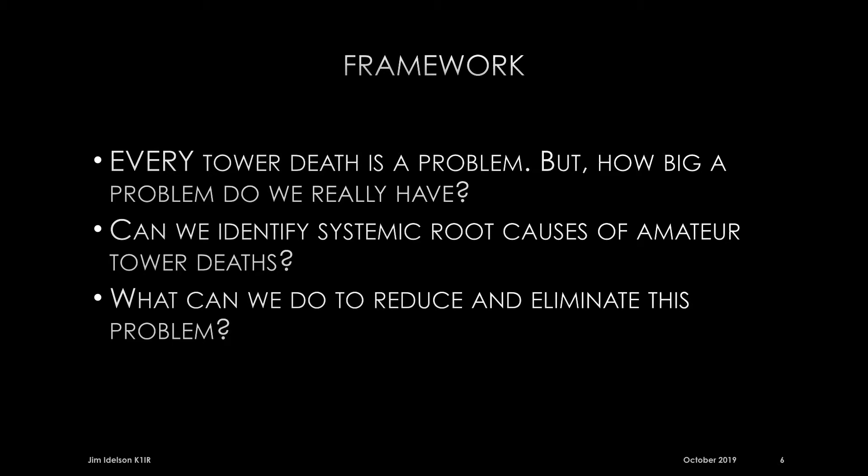All right, so another thing that's important to do is make sure that you're not reinventing the wheel. It turns out that in 2012, PBS Frontline and an organization called ProPublica, which is an internet-based investigative journalism kind of group, got together and they looked at a suspicious situation in the commercial tower climbing business, which was around the same problem. There was a suspicion that there were excessive numbers of fatalities in that business.

It turned out that there were problems that could be addressed. But what I found was that there were other things that I learned after looking at this. One being that there's a lot of data available and that we could use the data to analyze and compare. I noticed that they had already determined some potential root causes for the problems that they were having.

I also found that government has a role. Of course, we're talking about the commercial and occupational world versus the amateur at home in your own backyard world. But there's certainly things that we can learn. And then finally, industry, and there are standards. So there's a whole bunch that we could learn from what's already going on in the commercial world.

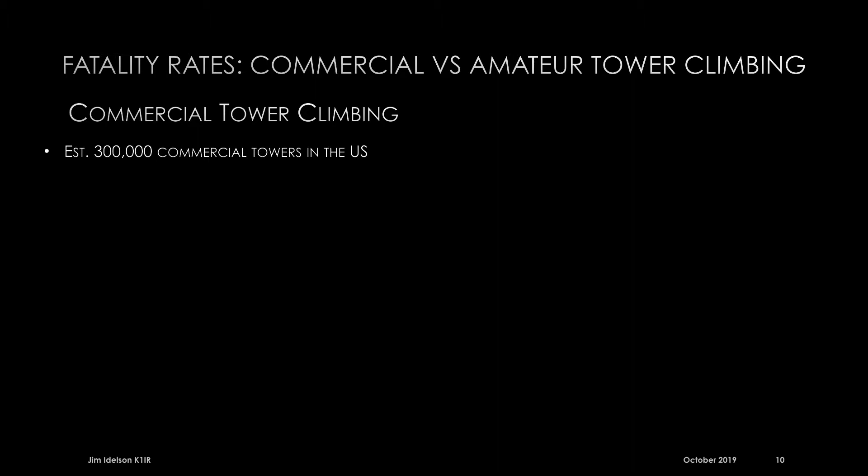Okay, so now let's look at the stuff we really care about. In the commercial tower climbing world, interesting number, there's an estimated 300,000 commercial towers for various purposes in the US. A little more than 5,000 full-time equivalent workers. Is everybody familiar with the concept of full-time equivalent? I didn't see everybody nod. So if I have 2 workers, each of them working 50% of their schedule, the 2 of them together equal 1 full-time equivalent. This is a way of getting the part-time problem out of the equation.

And by the way, there is a lot of part-time in this particular industry. There's probably something like 10 or 15,000 estimated workers, but full-time equivalent only 5,000 after you take the part-time out of the equation. The number of deaths, and again, all this data was collected and reported through both the OSHA data and the additional investigation that those guys did on PBS and Frontline, averaged over a 9-year period, 10 deaths per year.

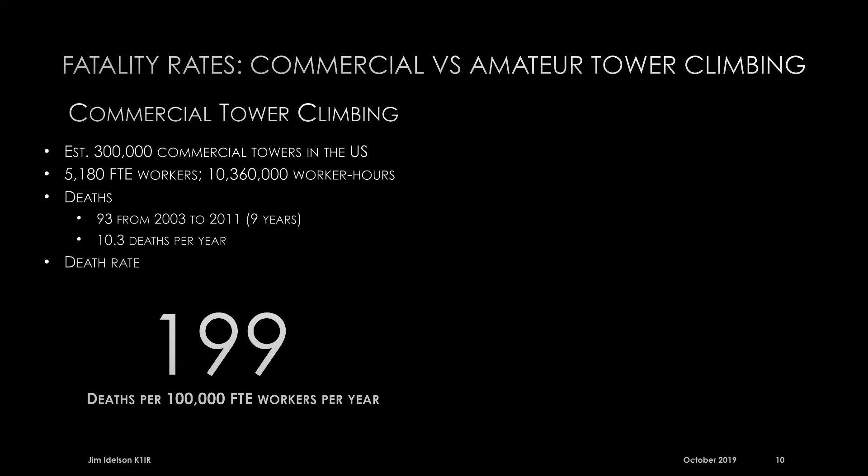So when you normalize that, remember we only have 5,100 workers, so you've got to get to the 100,000 level. It doesn't mean we're losing 199 a year, but in order to compare it to other things, 199 or roughly 200 per 100,000, right? Now, what's on the other side of this chart?

Amateur tower climbing. And there's a lot going on in here, and I need to talk about that a little bit. In order to come up with this number that's going to show up here, we had to come up with a model. How much tower climbing do we do, and how many?

In order to do the fatality rate, we need to have fatalities, which we know, by the way. If we just start with the 2 that we talked about in the last year, we have to divide by something, 100,000 full-time equivalent workers. So how do we get to that? So we took an approach where we made an estimate of the number of amateur radio towers in the US.

And you will ask, how do you come up with that number? Somebody asked. I'm glad you asked. I was racking my brains how to do this. And I was thinking about Sudbury. I live in Sudbury. I could go get a list of all the hams in Sudbury and run around and see how many of them had a tower in their yard. I thought that was a good idea.

But then I realized that was a somewhat spread out suburban kind of area. What would the rate be? That would be a sample, but not a very good sample because it wouldn't represent the urban density of towers. So we had to come up with something else. So we came up with a model where we used Google Earth, and we wrote some software, and we also had a suspicion that the number of towers per ham would be higher for extra class hams than for generals and then for technicians. That was just a working theory.

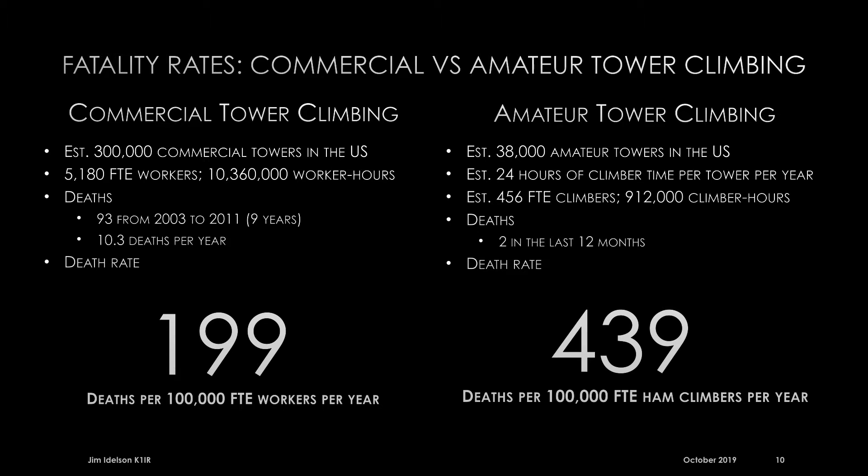And we had 2 fatalities in the last 12 months. There's the number when you normalize it to the 100,000. So it's twice as risky. As I did this research, I ran into more information about what was going on in our world. And it turns out that I got to move these 2 guys over to make room for 2 more in the same 12-month period.

Okay. Ken Waddell, this I believe was in Tennessee. Ken Waddell, a father of 5, was a commercial tower climber who was assisting a ham radio friend in working on his tower. And the tower came down and he lost his life.

This fellow here, Lee Parson, I think this was in Pennsylvania. And he was just working on his own tower in the backyard. And I think he was alone. I'm not sure, but he was putting one up, and he came down with the tower as well. Okay, so it wasn't 2, it was 4. And what happens to the numbers? Guess what? You know what happens to the numbers.

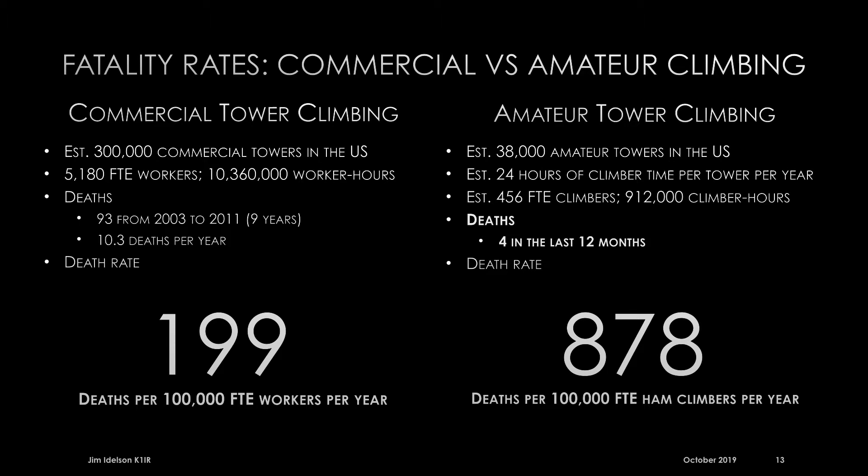They get worse. Okay, so commercial versus amateur tower climbing. With these assumptions, which I think, especially the 24, is kind of conservative, give us that kind of number for the last 12 months. Not good. And by the way, the 199 number that we had there, that was considered extremely high. That was at the worst of the situation with the commercial tower climbers. They've brought that down since as a result of the uproar that came about as a result of the articles that Frontline did.

Okay, so then I said, all right, commercial tower climbing, fine, it seems unsafe. Let's look at something else people consider to be unsafe. So I found some numbers on skydiving. Skydiving is pretty popular in the US. They count the number of jumps. The USPA, U.S. Parachute Association, is the group that handles all the safety-related stuff and tracking. They track the number of jumps and they track the number of fatalities. So 13 recorded fatalities in 2018 out of 3.3 million jumps.

Okay, so I needed to do some normalizing here again. How many jumps per fatality is this number? 250,000 jumps, 1 fatality. Now, over in the amateur tower climbing world, we needed to do something similar to jumps. So we just took those 24 hours and broke it up into 4 climbs, 4 6-hour jobs. I don't know, maybe it's less or more, but it's in that range. And again, we had the 4 deaths in the last 12 months. 1 climber fatality per 38,000 climbs. This is 7 times more likely than the fatality rate for skydiving.

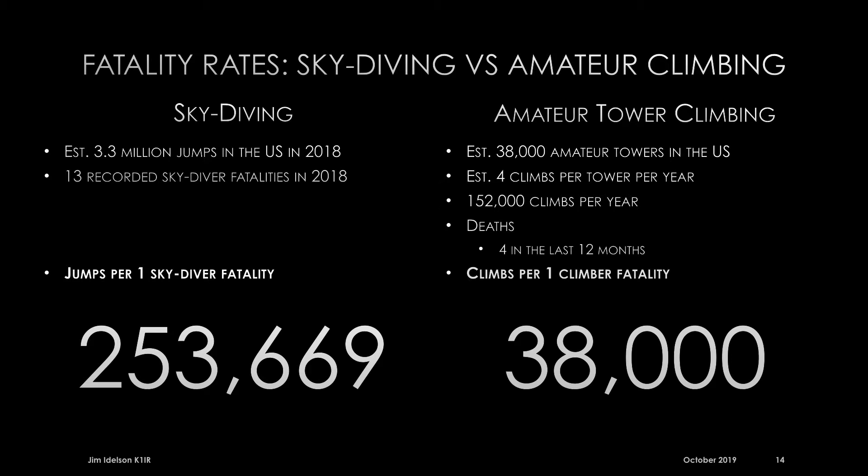Okay, so I think the message is coming clear that we do have a problem. The rate of fatalities that we have relative to the amount of climbing we do overall is too high. So I answered the first question. The first question was, do we have a systemic problem? I think we do. So now we move into the second phase of the investigation, and we need to look at the data and try to understand whether there are any of those root causes that we could attack.

All right. So one thing I wanted to understand, this is a little side trip here, how dangerous is it to work at height? What are you likely to get hurt at what height? I found a study that was done in New York City. It was done based on emergency room records in a Bronx hospital, where they had information on falls and injuries, but they also knew how high the person fell from. So there were almost 200 cases available.

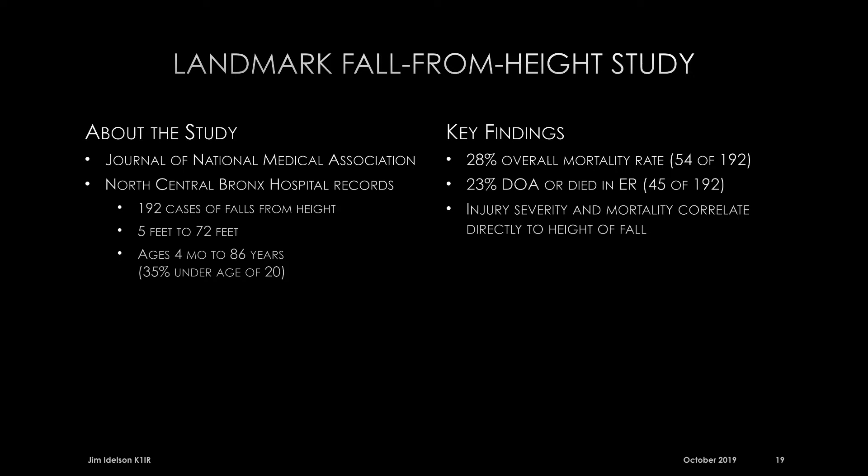The range in height that they fell from was 5 feet to 72 feet, and there were young people in here as well as older people. It turns out that this data is biased heavily towards under the age of 20. A lot of very young kids fall for different reasons from windows and stuff. And that actually has an impact on the results. 28% of all of the 192, 54, died, one way or another, either immediately or they didn't make it through treatment.

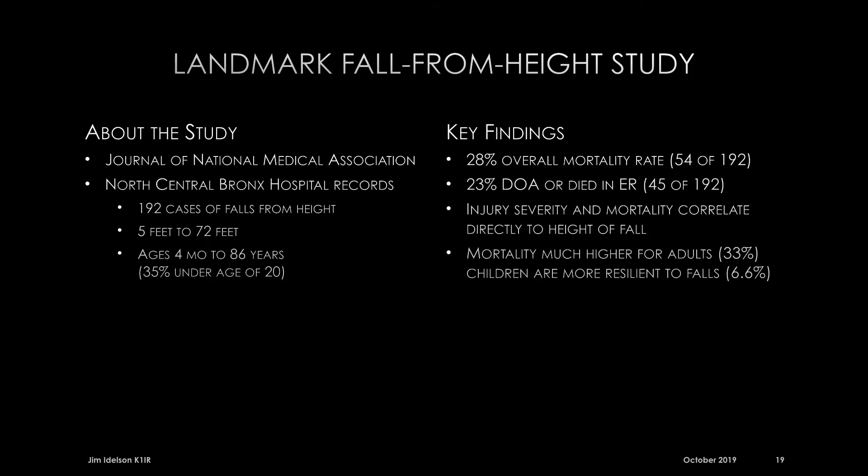23%, so slightly less, never even made it into treatment. They were DOA on the ambulance or on site or when they arrived at the emergency room. Very important is that the severity of the injuries, up to and including dying, were directly correlated to the height that you fell from. So the higher you fall from, the worse off you are.

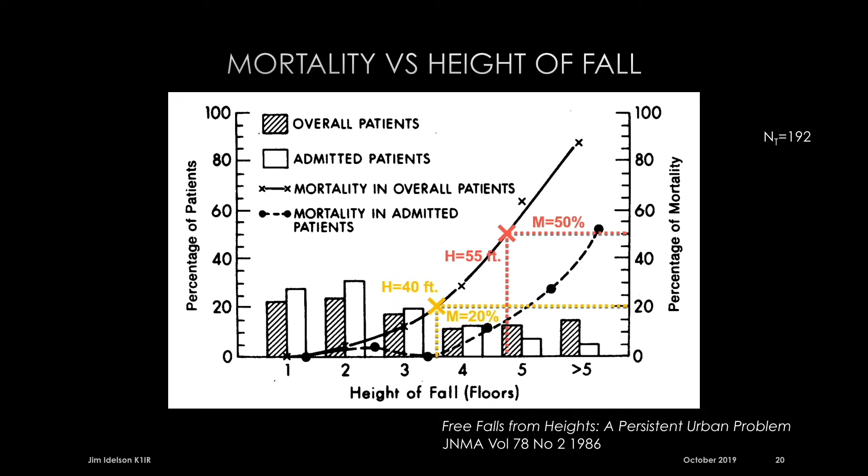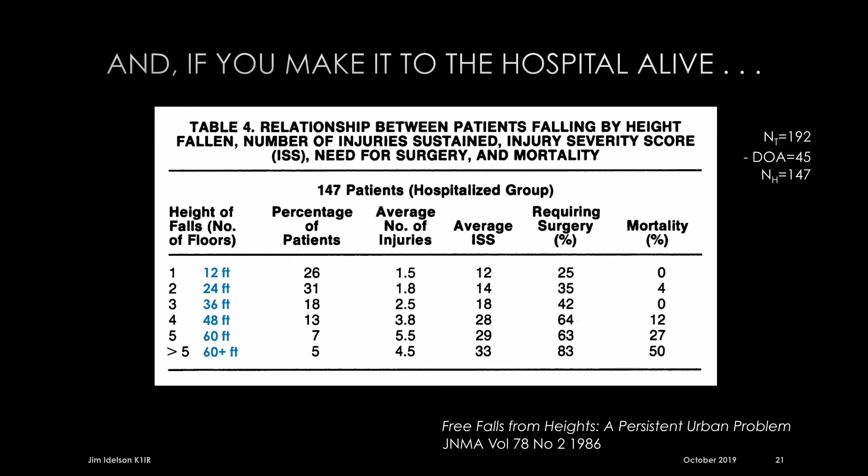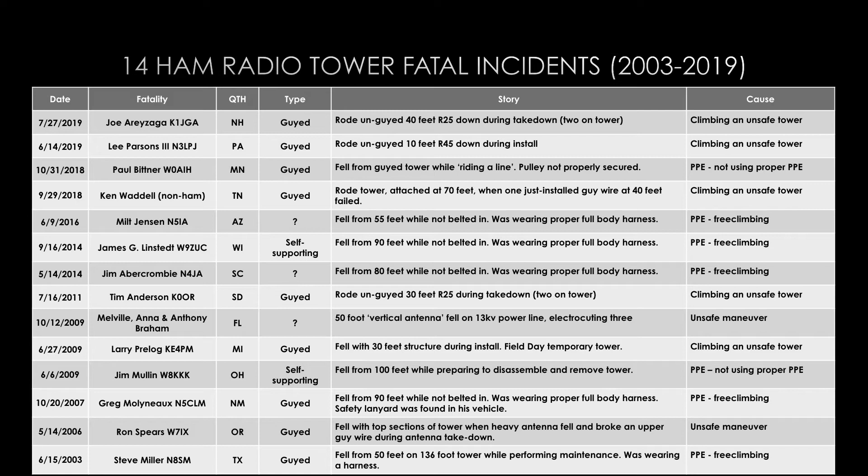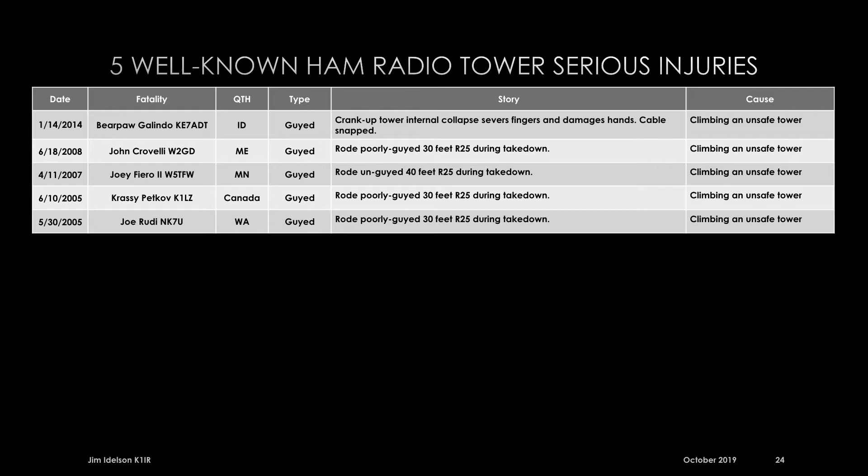These are 5 additional data points that I added in here just to get the statistics to be a little more, more numbers are better. More numbers are not better to have, but for the statistics, they're more helpful. These were serious injuries but did not result in a fatality. But the stories are almost the same. Okay, so now let's talk about what we got, some statistics.

The types of towers that were involved: this green here is the unknowns, I actually suspect that at least 2 of these were guyed towers. And so 13 of the incidents were with guyed towers. Self-supporting and crank-up, very small number. And I have these unknowns, which I believe are probably guyed towers.

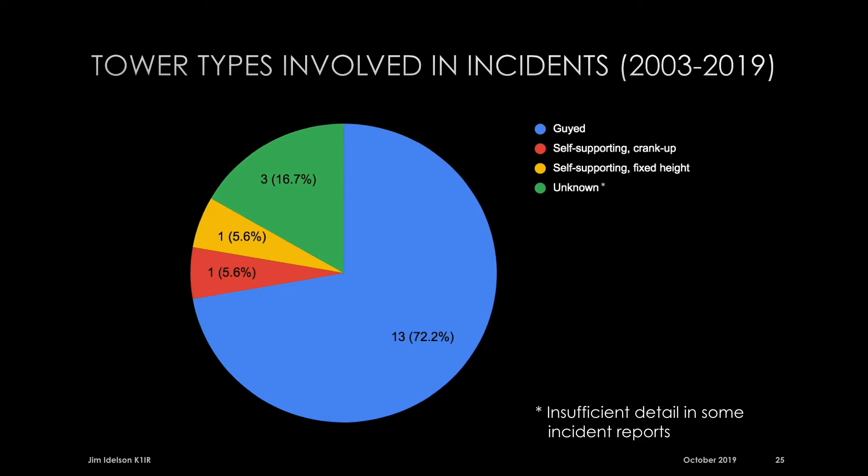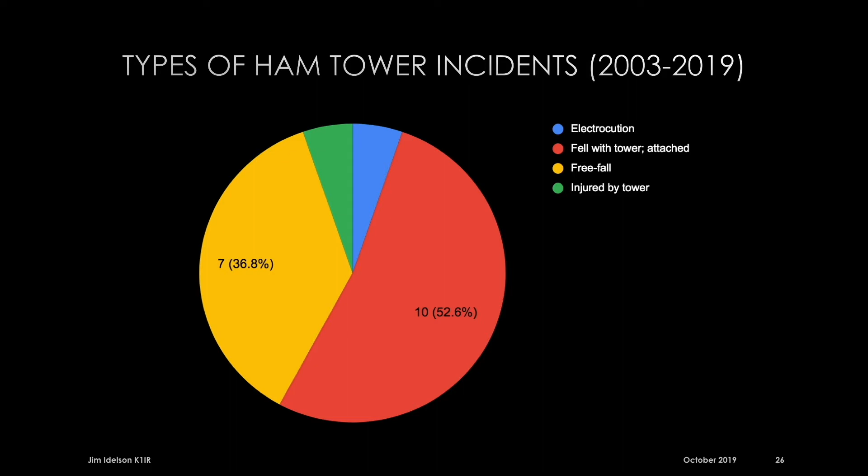The next level of slicing I did was, I noticed that there was a lot of this happening when towers were being either installed or removed versus when they were being maintained. So 8 of the 19 total incidents were maintenance. What I mean is maintenance is somebody's climbing the tower to work on a feed line or put an antenna up, to do something like that, not actually building the tower or taking the tower down. Okay? And these other 11 were all in that category, either building the tower itself or taking the tower down.

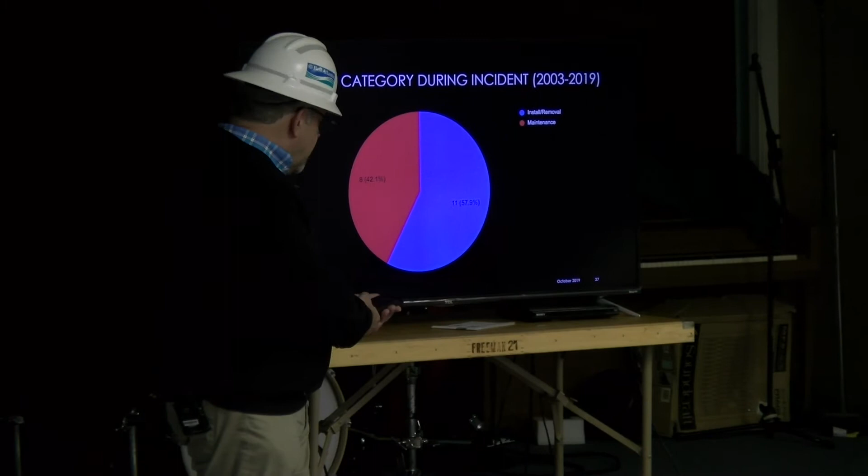The life of a tower, you think about the life of a tower, there's a lot more days and years that it's in this maintenance mode than in this construction mode. So already something's jumping out here at us, that the construction part of the life of the tower is suspect, right?

Okay. Incidents by activity. So now we break down these two parts of the life of the tower. During installation or removal, what kind of incident occurred? So 9 out of 10 fell with the tower. So somebody was attached to the tower while the tower was being built or taken down, and they come down. Right? 1 was free fall during that process.

And guess what? During maintenance work, it's all free fall. 1 injured, one injured by the tower. Okay. But when it was maintenance work, so in other words, when the tower's up and installed, the tower doesn't fall, whether you're on it or not.

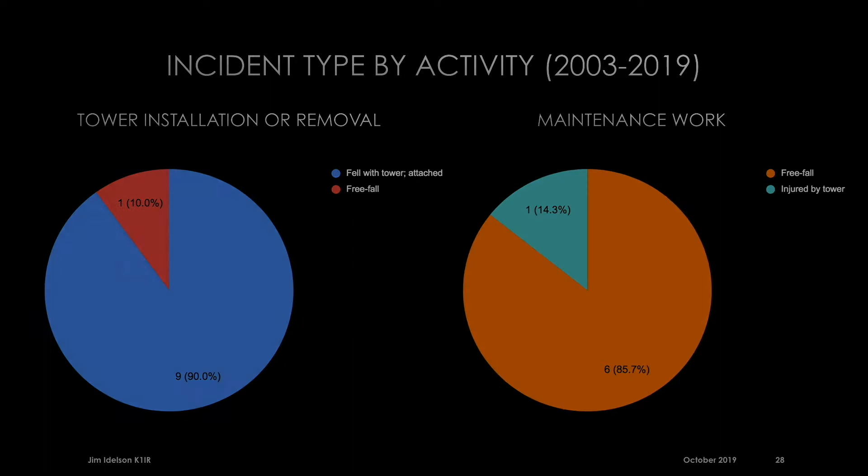Okay. All right, root causes. I'm sorry, you're able to see, okay?

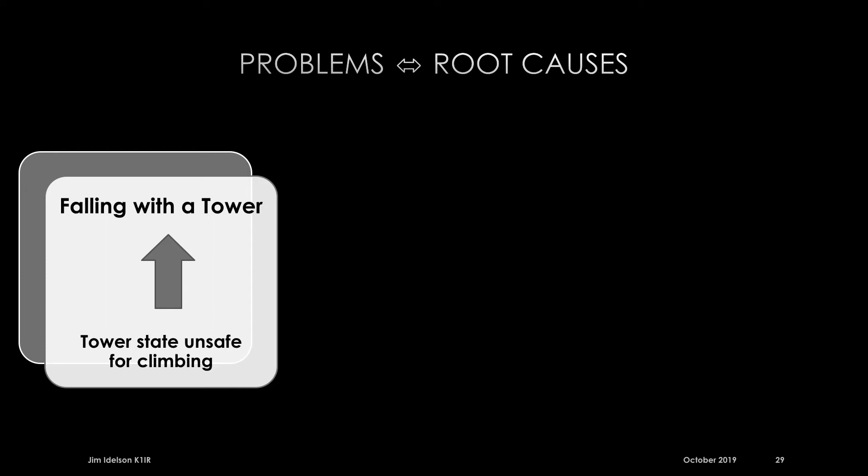All right. When you fall with a tower, when you ride the tower, it was in some sort of unsafe state. That's the only reason the tower was coming down, all right? I'll talk about the incident in New Hampshire where that 40-foot tower was not in a proper state for climbing. When it's free fall, it's about not using the right climbing technique or climbing equipment.

PPE stands for personal protection equipment. Again, this is something we can take from the commercial world. They've been through this. The rules say you must wear XYZ, and XYZ equipment must meet certain specifications. And then finally, this is where the electrocution comes in or other types of problems that we see, just doing stuff that's unsafe, doing things without the knowledge, without the right tools, without the right people, that kind of thing. So it's sort of an overflow bucket of things.

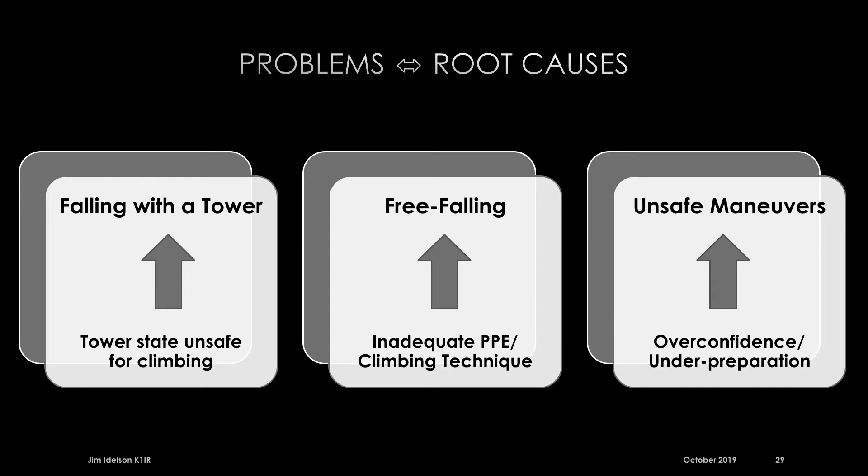All right, root causes. So we look at all of these cases and break it down into the root causes. 9 of the 19 were climbing an unsafe tower. 7, not using the right equipment. And then I introduced this term here, free climbing, which I'll talk about more in a minute. And then these few others here are unsafe maneuvers.

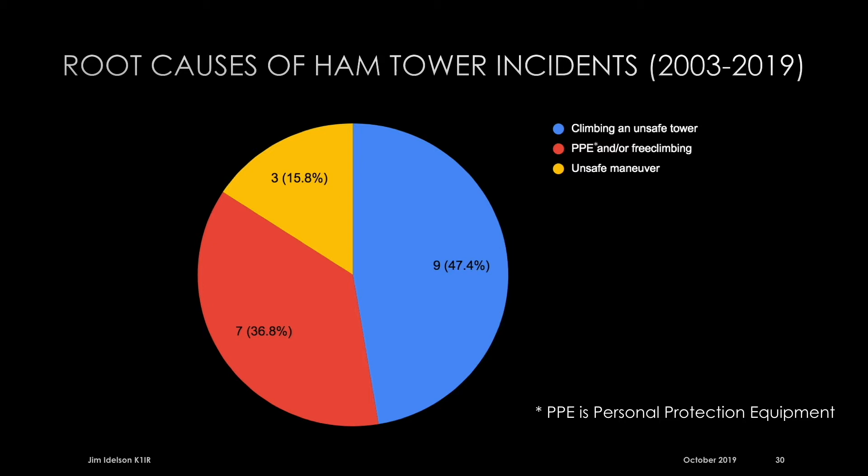So now, in the amateur world, this is the chart by year. Okay, there was this one year, 2009, where there were 3 incidents. But it was kind of 1 a year, mostly. In the last few years, it's climbed, and so this curve is going up. And seeing 4, these 2 bars here were in a single 12-month period. We're not even all the way through 2019. So, this is going in the wrong direction.

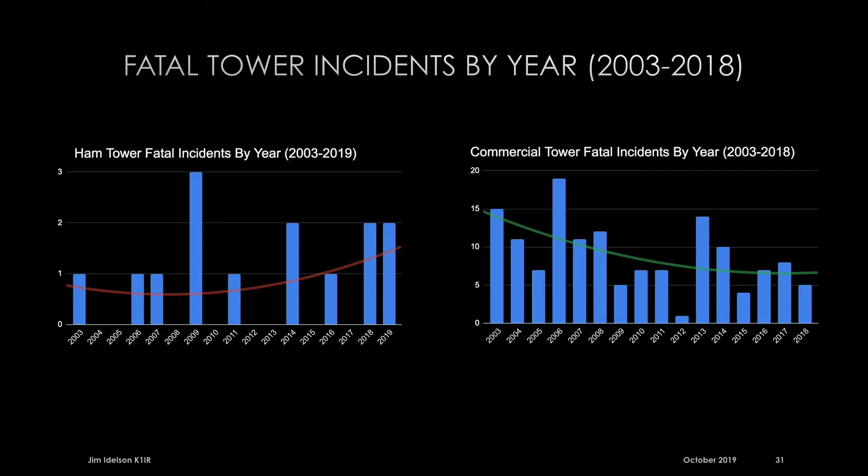This second chart is a chart showing what went on in the commercial world. And around here, 2012 is when they did that study, and a lot more regulation came out at that time. And so, if you look at generally here and generally here, it's down. And the point there is that I think there's some potential to do better. Where we don't have anything going on right now, no active initiatives, they put some active initiatives in place, tightened up regulation and that kind of thing, and it seems to have made a difference.

Okay, so my view is that we can fix this. We do now know root causes. We got the problem of not using the right equipment, personal protection equipment, and we've got the problem of towers being unsafe when we're climbing them. So I think we can do something with that, and I'll talk about that. I think we accomplished 2 things. We defined that we have a big problem, and second, we got some data that leads towards root causes, but we're not quite there in the root causes, and we'll talk about this.

So the 2 big ones, the unsafe tower climbing and the climbing without the personal protection equipment, are what I'm calling this deadly duo. Okay, climbing unsafe and free climbing. All right, now we're talking about the term free climbing. So let's talk about each of these separately. Climbing unsafe towers. I've added a word in here, knowingly.

Okay, remember, when do these falling with the tower incidents occur? During construction and during removal. And by the way, these were almost all guyed towers, not self-supporting towers. So what do we do when we take down a tower? Anybody take down a tower? A guyed tower?

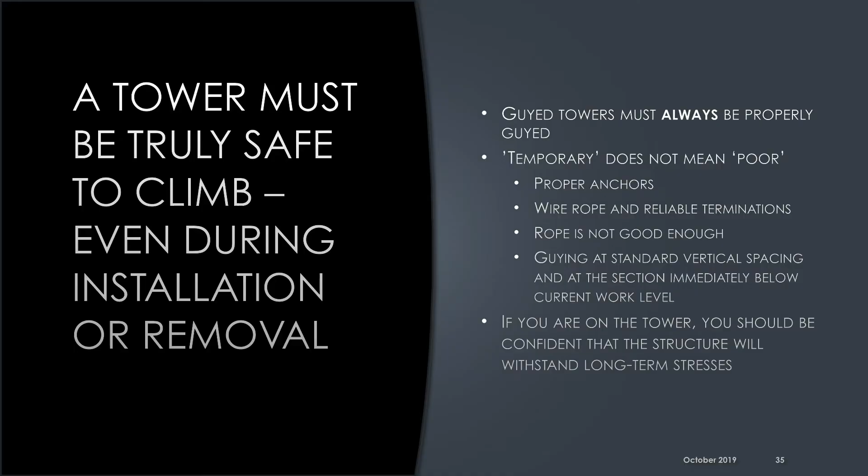First thing we did was we brought in our own separate set of temporary guys. So these are steel guys, and we attached them just a little bit below, or right at the top of the 3rd section down. Okay, so there were 2 sections up above that were going to be unguyed after we removed these.

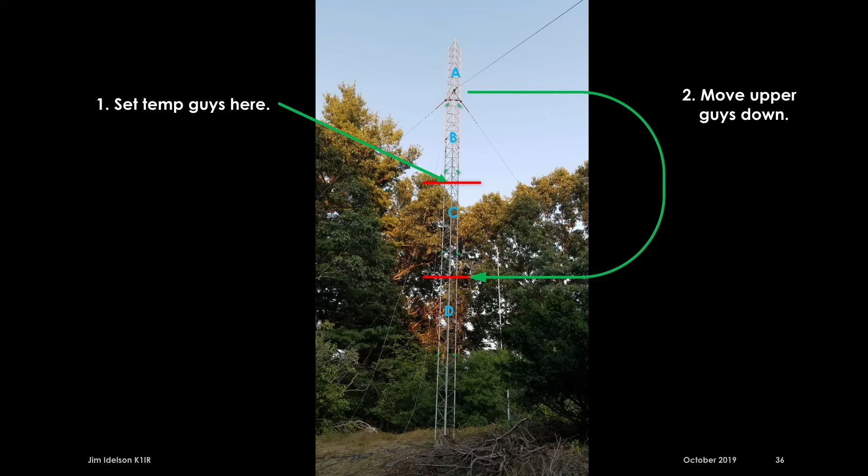So we removed these guys up here, and we replaced them, we put them down here. So now the tower is actually guyed more solidly now than it was when we started. We've got 2 sets of guys in the middle, but we got 2 sections up above. So we take off these 2 sections, and now the thing still has 2 sets of guy wires on it.

We remove the upper ones, and then guess what? Over here, we loosened these guy wires at the anchors. We're not on the tower now. Nobody's on the tower. We loosened them out at the anchor points. You may see inside this tower there's a pipe, there's a mast. We lowered the mast, big 20-foot mast inside the tower.

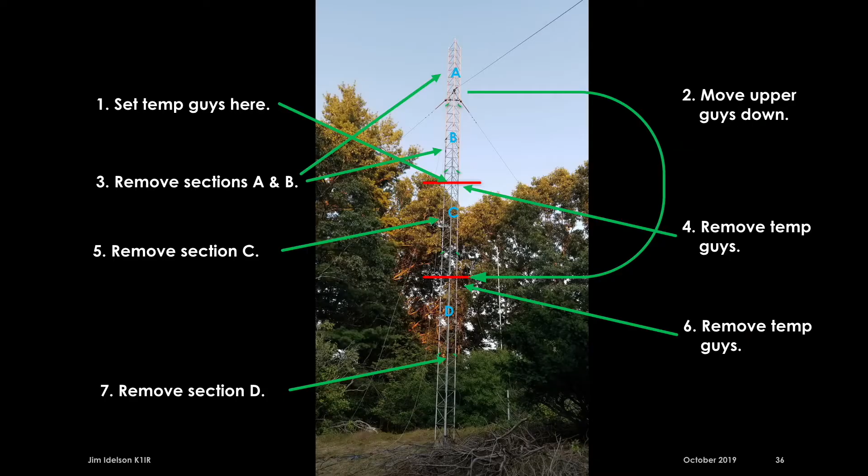We used a Sawzall, and we cut this off at the base with the 5 feet that was exposed from the bottom section plus the 2 sections above. We just let it fall. So there's nobody on the tower at that point. So we were never on the tower when it was not guyed. So that process worked. Now that process took extra time because we had to set and move guy wires, but that's the cost.

All right, so the point should be clear. A large number of these accidents, all of these ride-the-tower-down things, happened when people were putting up a tower or taking it down and they didn't have it properly guyed during the construction or removal process. That's the important point. And the solution to that is real good temporary guys.

Okay. Free climbing. So who knows what free climbing is? Okay. What you think of in your mind of free climbing is this very risky behavior of not being attached at all, not wearing any equipment at all. But actually, OSHA and the standards people and people who regulate this in the working at height business call free climbing any moment that you are not securely, properly attached to the thing you're climbing.

And that's important. So if you climb with all the right equipment on, and at a certain time you don't use the equipment properly and you're not actually attached for a moment, your climb has been classified as a free climb. Okay.

Here's field day. This guy's swinging his lanyard around. He's not attached. And notice these are ropes. Okay. Here's another field day, more ropes, and a guy who scampers up here to attach the antenna.

I don't know, what are these guys doing? This is probably all familiar to you. We've all been at field day like this. This is not okay, and our attitude needs to change, basically.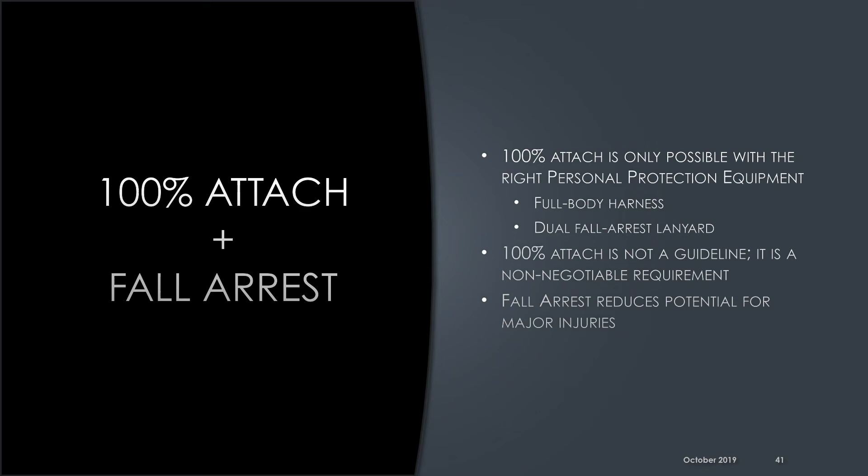Sometimes I get some comments about, you know, OSHA has all these rules, but they don't really apply to us when we work in our backyard. And it's true. They're not mandatory for you as a homeowner working on your own stuff. If you get paid for the work, you're now officially under OSHA rules. And then there's the ANSI stuff, which is recommended.

But did you know that there is a set of laws that does apply equally to commercial tower climbers and amateur tower climbers in their backyard? Does anybody know what laws those are? You're on the right track. I call them Newton's laws. Newton's laws. Okay. And the point is, that should be enough motivation to do the right thing. Okay. All right.

This is me on my tower. I'm at about 60 feet here. Let's see if this works. I'm doing a demo of climbing, and I've got this antenna and there's guy wires here attached, and the positioning harness you'll see is below the guy wires, and I've just put one of the attachment things up above high. Okay, and I just let the positioning harness go because I can't get it up past the guy wires any other way, but I'm attached. And I'm attached actually on two spots.

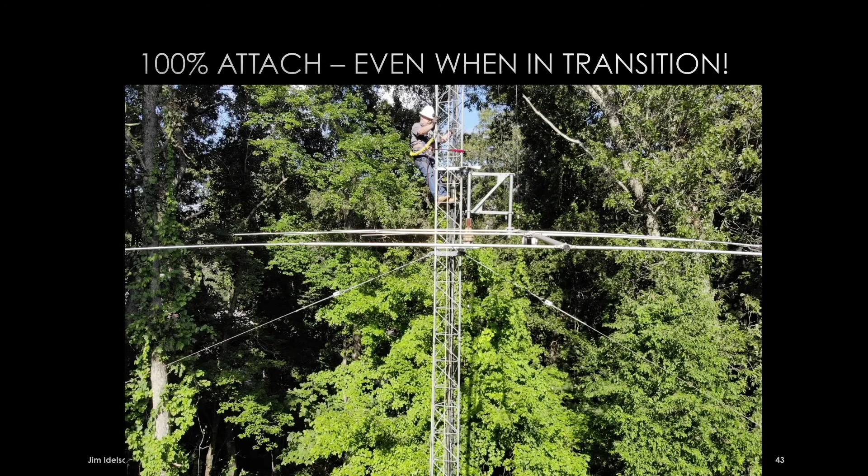Okay, so we have talked about 2 big things. We talked about the temporary guying, the problem of guyed towers falling with a person attached, and we've talked about how to prevent free fall. The last thing is this concept of unsafe maneuvers, and you recognized already the electrocution being one of those. Here are 2 stories real quick.

One is, here's what was going on. There was a little project going on. A few people were at a house, and they were tilting some sort of antenna support. I don't know exactly what it was. I'm calling it a tower, up at the base, and it was going to be bracketed to the side of the house. A few people were raising this, and one person was on the roof to kind of catch it and pull it in. Okay, and guess what happened here? This was the electrocution. So this thing, instead of going up where it was intended, it tipped and it hit power lines, and these people died, and they were all members of the same family.

Okay. The second one I'll tell you about was a little different. In this case, they were removing a big 40-meter Yagi. It was a big antenna, over 300 pounds, and I think it was a 100-foot tower. One guy is up on the tower, and he had a couple of ground crew. I got the sense from reading it that they didn't have fancy rigging to do this job. And what happened was the antenna fell. I'm sure he was trying to do his best, but he lost it up there, and it fell on one of the upper guy wires, and the tension of the 2 other guy wires pulled the top of the tower over, and it folded, and he was on it, and the whole thing came down.

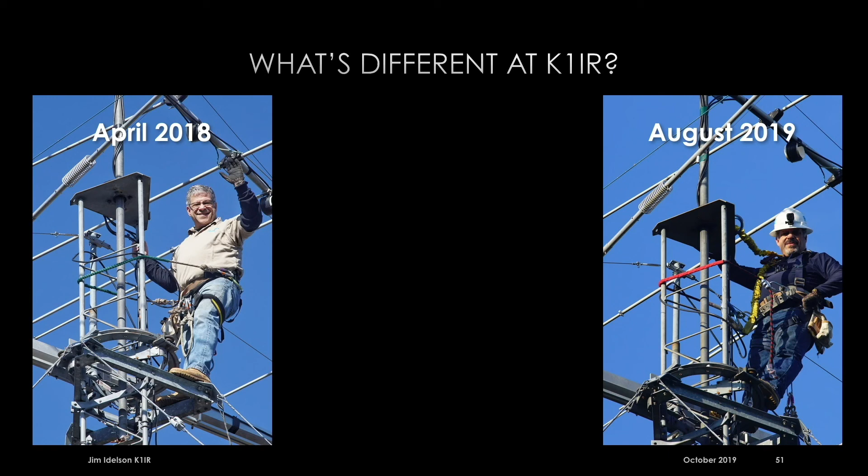Okay, let's see. All right, so my story. So this was the picture of me a year ago, a year and a half ago. Now I've got the gear on. Got a helmet on there too? Yeah, my helmet is not acceptable. This helmet's no good. This should go in the pile too. It needs to have a chin strap. Okay. So that's got to go. I got to get it. That's a $60 investment.

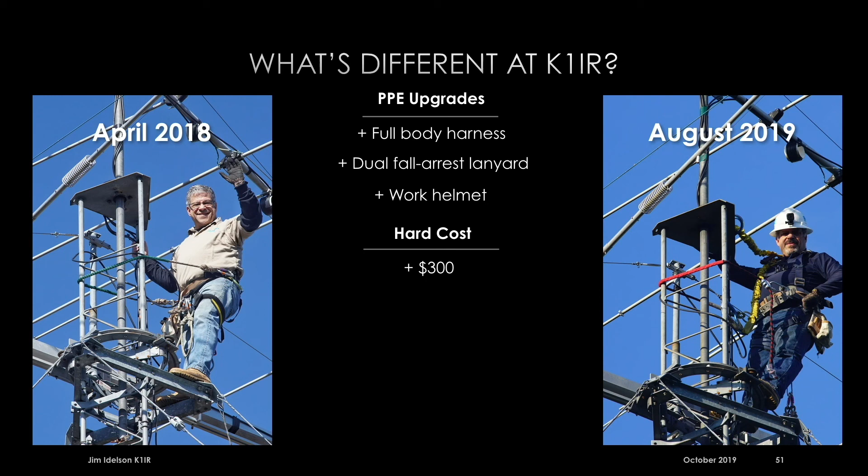But I'm fully attached. You know, I've got the hard attachment going around the leg of the tower. I'm not fully dependent on the positioning lanyard for this job. The dollar cost was a few $100, but the real more difficult cost to accept is this kind of stuff. 3 times as long to climb up and down the tower, 3 times as long to just move from one spot to another. And that's the moment that you hurt yourself.

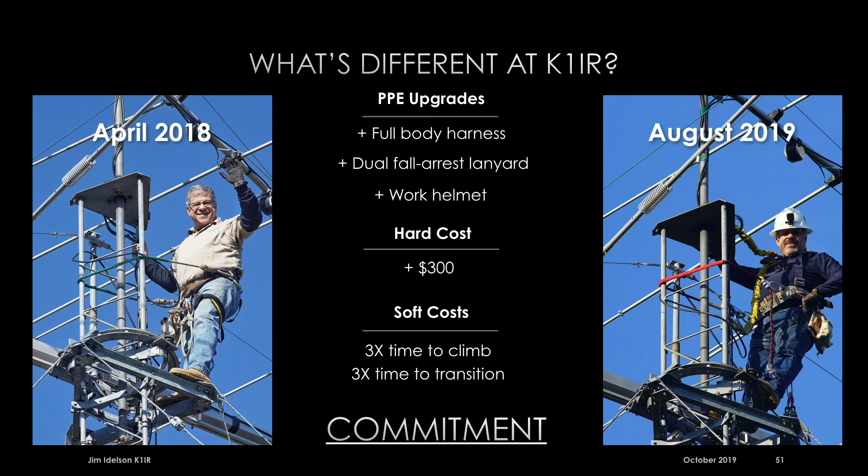That's the moment. Okay, if I was wearing my old stuff, the minute I get to the place where the work is going on and I'm strapped in and things are attached, nothing's going to happen. That's pretty safe. The moment I have to move, climbing, I got to tell you something, climbing from underneath that stuff to above that stuff, there's a little bit of acrobatics involved in that here.

Groups, okay, local groups, so clubs. So there's things that we can pool together as a club, right? Expertise is a big one. Just, you know, person power, having people available to come and help. And then there's tools, the ability to share tools. So all of these things, and it's smart to, you know, we can share costs. So we can have a couple of belts that the club owns that we can loan out for this kind of work.

One thing that we put together is this thing, Mark Pride, K1RX, came up with this, which is a kit. And we've kind of got one of these kits together for the Yankee Clipper Contest Club. It's a set of guy cables and come-alongs and the attachment hardware and all the things you need for that one set of extra temporary guys. So we can loan that out.

So at the national level, there are opportunities for national organizations. You know who our primary national organization is. The ARRL could have a role here, but maybe others as well. To kind of be a centralized repository for information and training and to get the message out. And it will take some investment to do that. Art, that was real smart.

The NCVEC, the National Conference of VE Coordinators, creates the question pool. Well, there are just 2 questions in the entire pool for all license levels right now that have anything to do with safety. There are other topics that are much more esoteric and less relevant to almost any ham that have a lot more questions. I think that the basics of safety are probably a pretty high priority and should have some questions. And especially in the technician element, element 2.

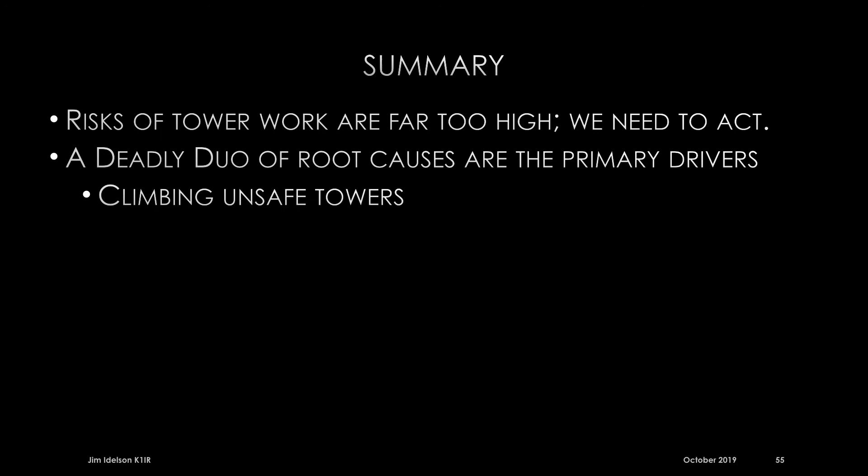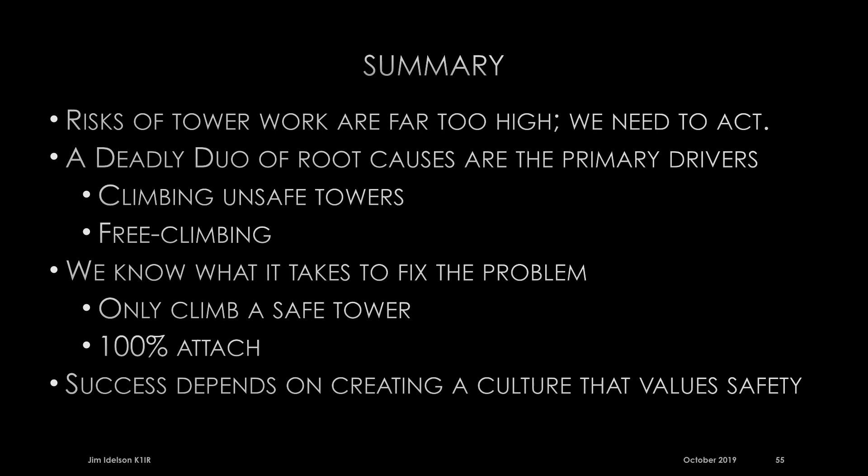So, we're getting to the end. Summary. We definitely have a problem and we need to act. I think we've got these 3 primary root causes, of which the deadly duo are really the ones that we want to attack. I think we kind of know what approaches we can take to solve the problem. And finally, this idea of creating a culture that accepts this and values safety as a high priority is very important.

So then I ask the last question, which is, the individual level is important. When we started this thing, I asked you if you were a tower owner or a climber or a ground crew. I'm sure that there's something you can take from this, no matter which of those roles you have, and do better the next time you're involved in one of these projects.